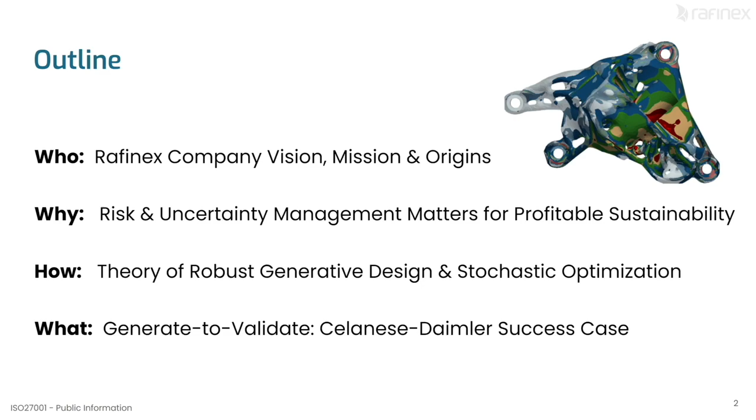Then we'll actually dive a bit into how that works. I am not holding back on how we do things. I think that's very important to also help with the language and know-how in the community.

And then at the very end, I'll discuss this on the ground with a Celanese-Daimler car part, and how that actually turns into money on the road.

Quick thing: Rafinex is a company I created in and around algorithmic innovation. We really focus on a much more efficient, sustainable future. Building cars, fridges, anything—we cannot continue this resource hungry path. Our niche contribution to that area is developing new CAE computational analysis capabilities and building those into software.

We are a European outfit from the get-go. We have people from Berlin, people from London. I myself was at Imperial for quite some time, and our knowledge is really HPC, FEM methods, numerics. It was mentioned this morning that very few people know how to actually run an HPC with 10,000 cores—well, I've got the people at home to do that.

So, second part: why risk matters and how it is key or not key to sustainability at scale while making profits. One thing often overlooked or not exploited enough is that 70-80% of a product's impact and costs throughout its lifetime are driven during the design phase, on day one.

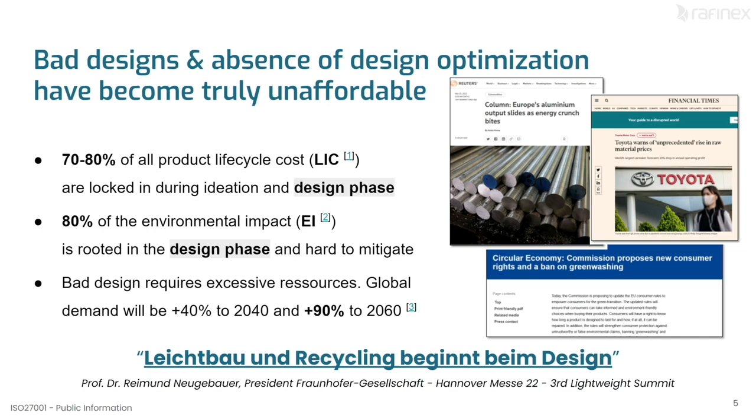I'm not talking incremental improvements. There's this guy from the Fraunhofer Institute who said that really lightweight design and recycling all start on day zero, at the design phase. So this is really where the value is. This is the carrot.

Now, what does profitability at scale really mean? It means building stuff using a lot less energy, a lot less materials, using less energy to operate. That's optimization tradecraft—it has been around for some time. So why is it not mainstream?

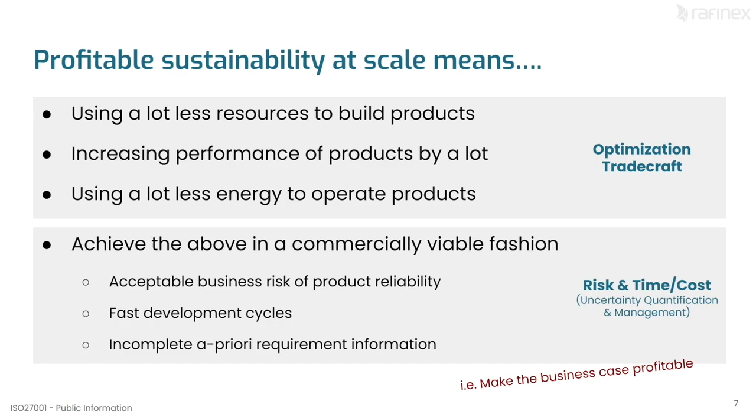Our theory, or one key contribution to that, is it's not fast enough. It doesn't account for risk, because if your product has reliability issues at the end of the day, nobody will buy that, right? So how do we do the first part while taking care of risk and reliability, and being fast enough to do this on a daily basis?

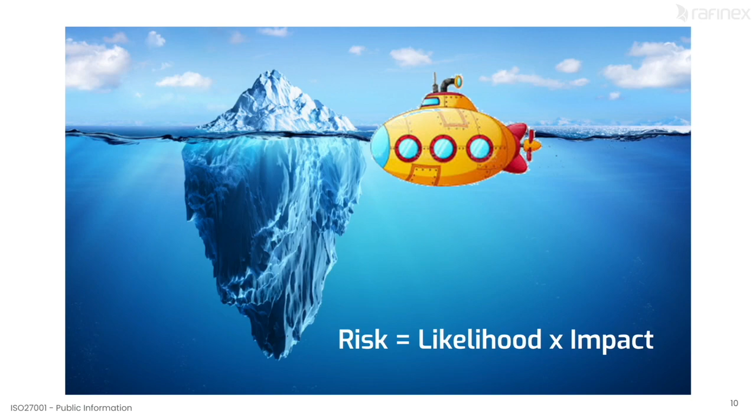So if it's risk that really kills the deal, how are we doing that today? Let's say we're designing some product, and there are requirements we kind of openly know. We put them in a requirements envelope, which may or may not actually be complete, but we wholeheartedly know there are other off-design conditions that this product will see out there in the world, and that is a known risk.

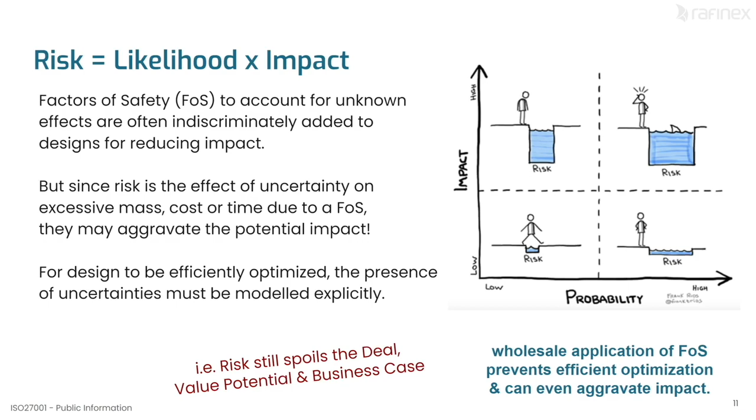We know it's there but we can't quite quantify it. Well, there are ways to quantify it, but the problem is that when stuff starts moving, just making your design fatter in every direction is not necessarily a smart move, because it might actually aggravate certain conditions, especially when it moves and has to stop, with accelerating and decelerating masses. So you only want to add mass in directions that are relevant, while keeping irrelevant or safe directions free of extra mass. So one key contributing factor is that wholesale application of factors of safety can make or destroy optimization from the get-go.

So that brings me to how. How do we actually do that? How do we still optimize with active knowledge of risk management? And this is what we specialize in.

We are really specialists in stochastic optimization, particularly in the context of topology optimization. And for the specialists in the room, it's a merger between UQ methods and classical topology optimization. Language was also touched upon a few times today already.

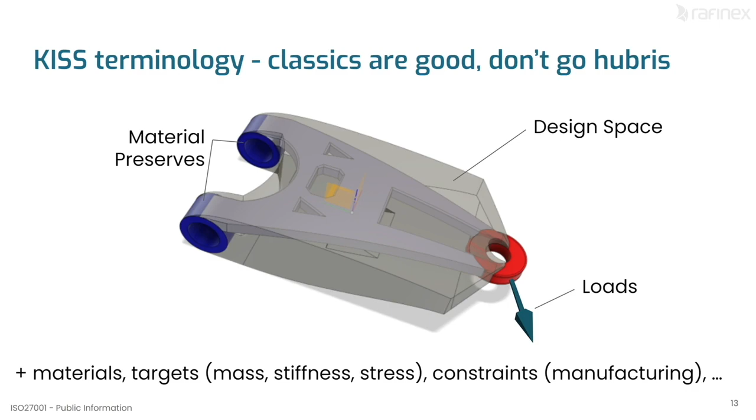I'm a big fan of the classics. If you haven't invented anything new, don't give it a new name. Use what everybody else calls it, right? So no need to go hubris or confuse the market with hyperinflation of names.

And then so this is kind of our standard field that we'll operate for the next couple of minutes.

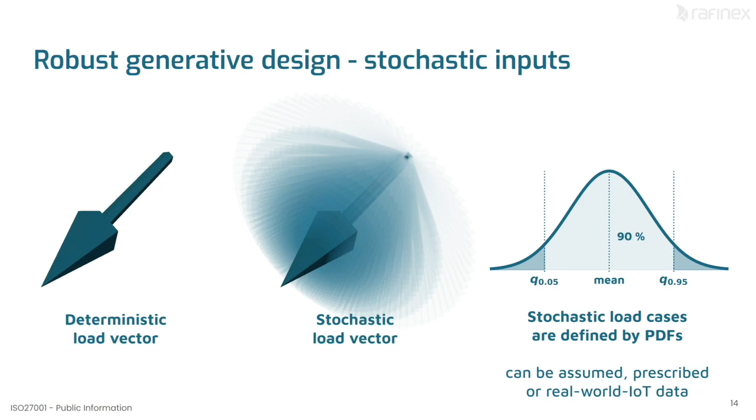The key difference for stochastic optimization is that anything that has to do with inputs, loads, material properties, they don't have to be assumed to be perfect. So your risk or your variabilities that you know or can estimate are baked into the inputs. These variabilities can either be known because you measured them in the lab, they can come from IoT data, there was a nice picture from the running shoe this morning, right? They can come back from sensored equipment. Or they can be prescribed by legislation or so on and so forth.

So if you set up your optimization problem like this, this will happen. If you make the optimization aware of variability, it will be able to sense in what directions this variability is important and in what directions not important. It's key that these variability conditions are integrated into the search gradient of the optimizer, otherwise this trick doesn't work. But what happens is that you don't get idealized optima points, but you get formally robust optima points.

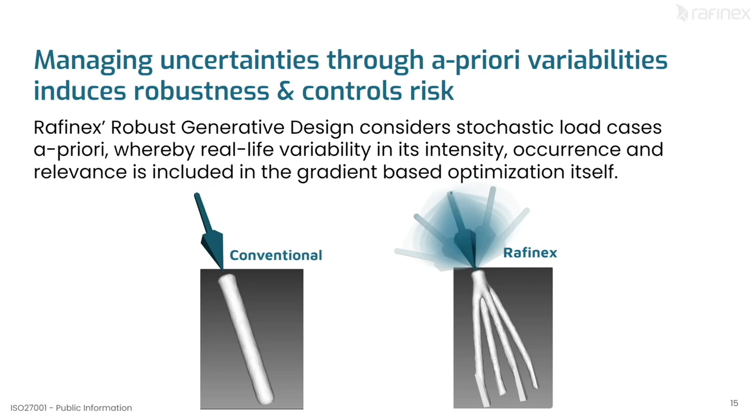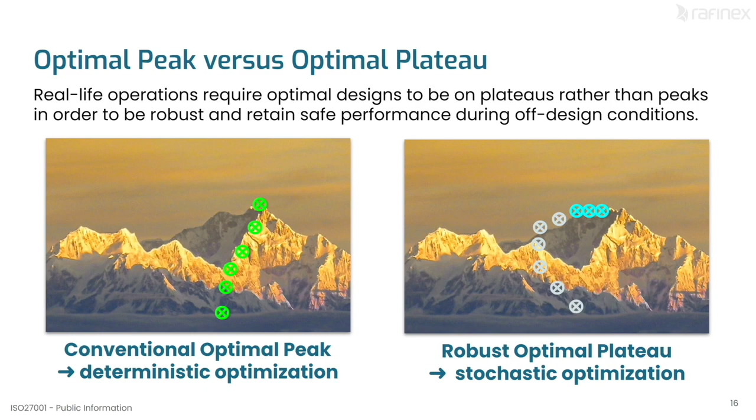There's a reason we're sitting on chairs and not sitting on segways, for instance. This is kind of the logic. So there are better designs out there, and there are idealized designs out there. In terms of solution space and math surface, standard optimization will always try to reach, locally speaking, the highest peak in the mountain range, versus robust optimization will try to find the highest plateau in that mountain range, so that if your design is perturbed from your assumed conditions in operations, it won't suddenly suffer a massive crash in performance. So you get this kind of safety buffer around you. That's the whole concept.

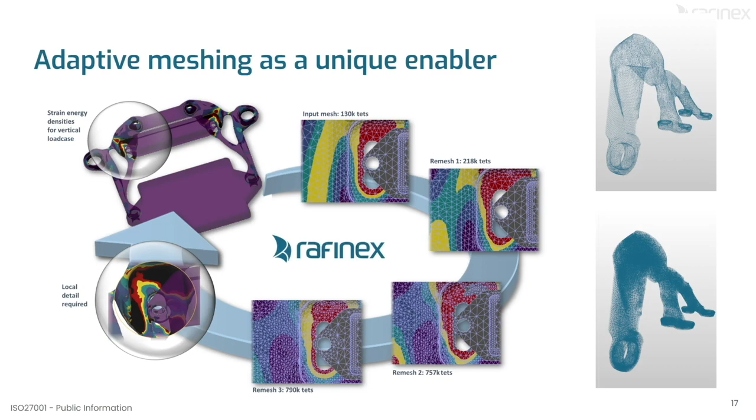Quick side note, because it's actually important, we also use fully adaptive TET meshing during optimization, which has several convergence and engineering quality properties, but more than anything else, we don't need to do any filtering of voxel or meshing or kind of smoothing, and the reconstruction later on is also much better.

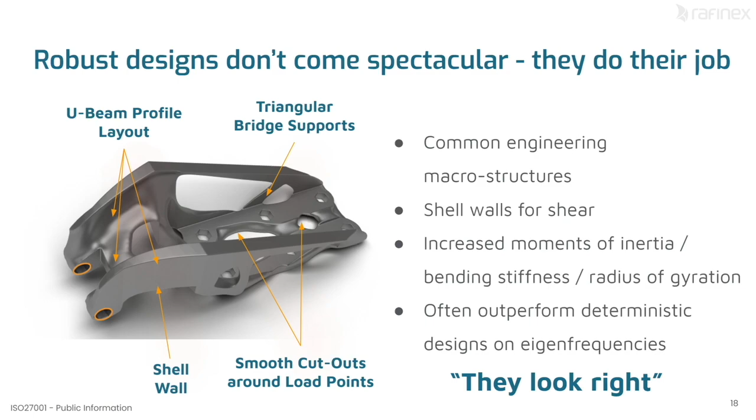So this is key. Why? Because robust designs, they don't look super Bugatti brake pedal crazy when you take them to the stand, but they look kind of reasonable. They tend to have very good vibrational properties. They can develop shell walls because that's due to the adaptive meshing. Shell structures is something that you rarely see come out of a normal optimizer. And they, like you called it this morning, they just look right. As an engineer, you can look at them, and once they're there, you can kind of follow why they do that job the way they do it.

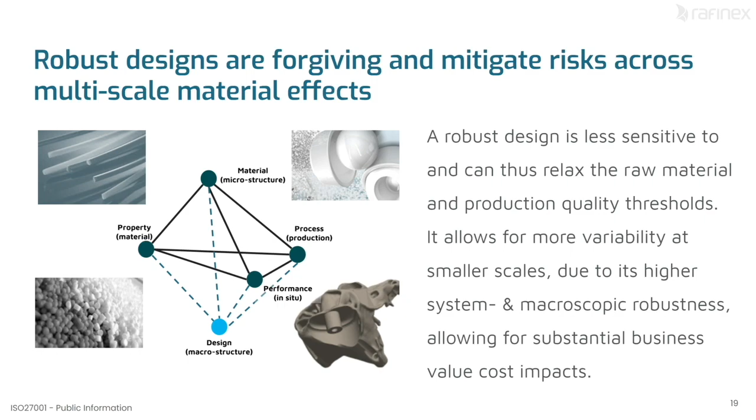Robust designs also have this neat feature that they are forgiving, meaning that you might not need the A++ grade of the material to build your design, because they have very smooth stress fields and stress behaviors within them. You might get away with using grade B material, so you can save a lot of costs there. So we have seen this in the past.

So in that sense, I hope I have convinced you that bringing the awareness of real-life variability into CAE, into optimization, leads to much more applicable, fit-for-reality type designs.

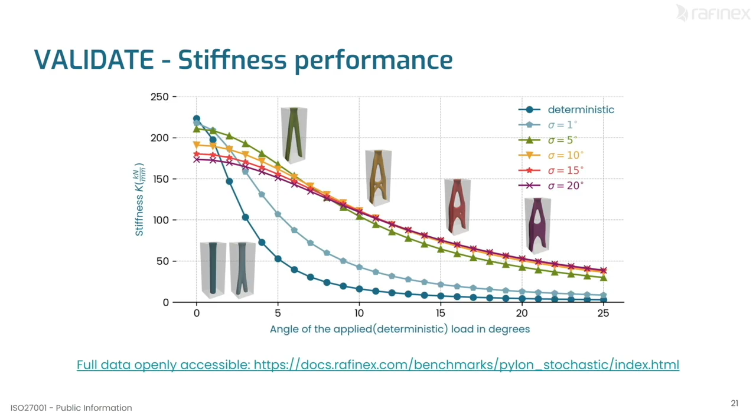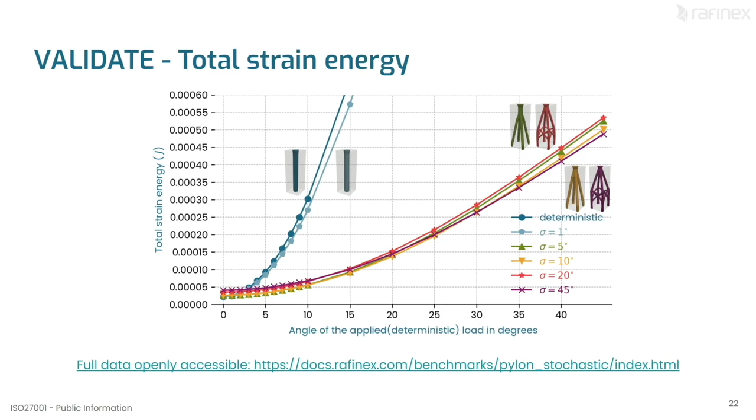So here we can see effectively this is the mountain range. We're sitting on top of a flat mountain rather than a steep mountain, and also during off-design conditions our strain energy doesn't go through the roof. Ergo, this explains why we have better frequency and better eigenmode properties as well, because the two properties are linked. Yeah, here we go.

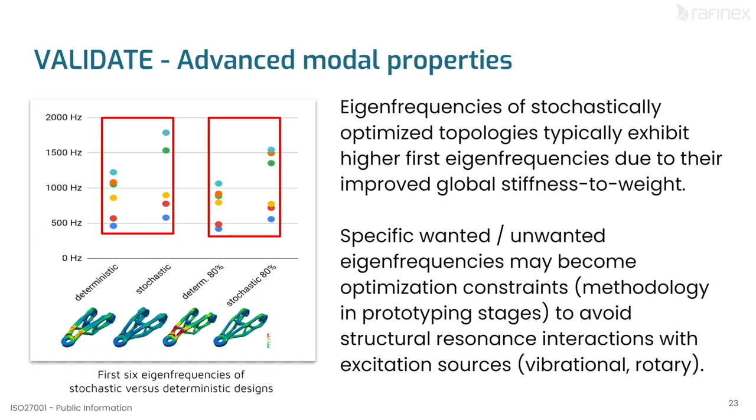So robust designs have better frequency properties, which is key for automotive, but also aerospace and space applications.

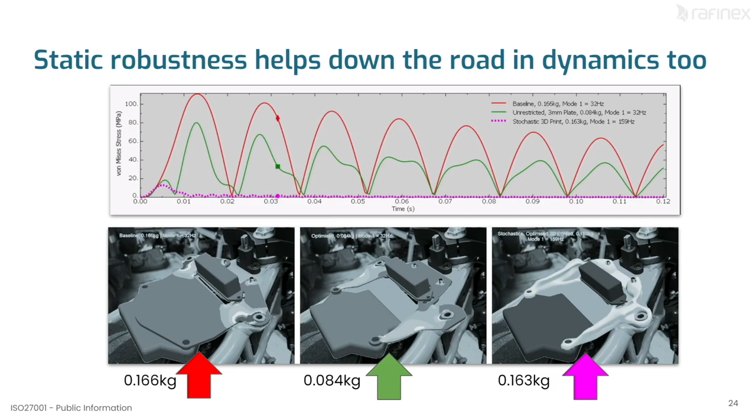Also, while everything I just said is effectively linear physics with uncertainty-driven inputs and search gradients and getting a statically robust design, you have follow-on positive impacts on durability and frequency properties, because you have this advantage that robust designs have this smooth stress field within them. So you do a lot of good on day one if you do robust designs.

Also, it's not all about additive. Here are examples of straight output. That was actually a robot part that picks up randomly oriented parts. So the question was, how do I optimize a robot gripper for randomly oriented parts?

The load conditions are not properly defined. So we managed to get through that, and in the end, they just hit print and put it on the robot, and it worked. This also exists in hollow, if you want it.

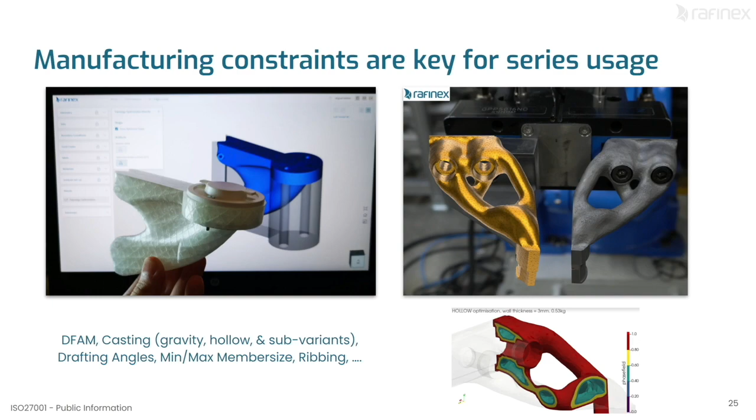The key is, sometimes it's said that generative design equals manufacturability versus good old topology optimization, which can't do that. That's a lie. Manufacturability constraints exist in existing topology optimization codes. So I want to clean up some confusion there.

If you take away one thing from today, please judge designs on their numbers and not their looks. Too many times you get a generative portfolio, 25 designs on the screen, and then you go like, oh, number 17 kind of looks cool, but who says number 17 might have the worst frequency properties? So always run the validation and look at the numbers.

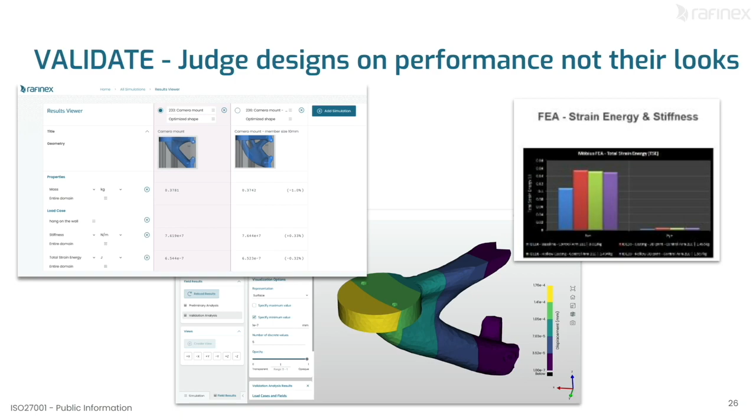We can quantify robustness, so this is a part I can't show. There was a baseline design, a normal optimized design, and a robust optimized design. Throughout the operational conditions, we looked at how often we stay below a certain threshold. We did that for 95% of the cases for the robust design, as opposed to 77% for the baseline design. So we find you this advantage.

You can do two things with that. You can say, thank you very much for the extra safety, or you can trade in that extra safety. Maybe 77% for your product was adequate, so you can then take mass out of the system until effectively you get back to your 77% robustness level.

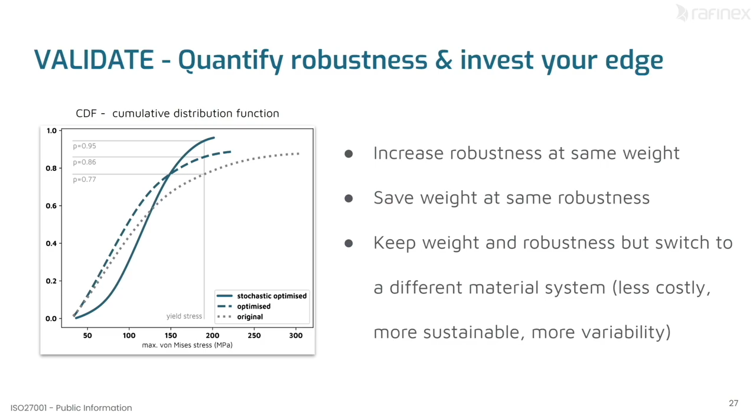One very interesting field we operate in is variability that occurs from real life load conditions that fluctuate, but there's another area of uncertainty that comes from project management. A greenfield project with undefined requirements on day one. If you do standard optimization, you optimize today, change your assumptions tomorrow, and your design may change completely. Robust optimization doesn't do that.

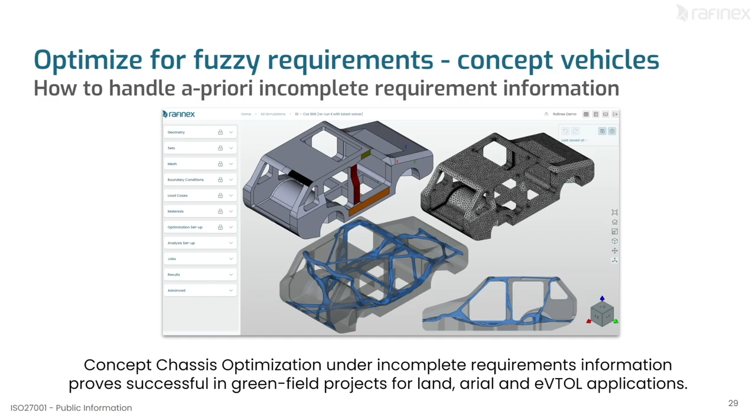So as long as you can say, eVTOLs, who's built eVTOLs before, right? There's no historical reference cases. As long as you're able to say I can reasonably assume my loads to be between A and B, with robust optimization you can get going, find good macrostructures, good torsional stiffness designs, and then make project management decisions on that basis.

So, very real, very show-me-the-money. This is a part, an engine mount from a Daimler car. It used to be metallic, pre-2017, 2018. Then Elringklinger, Daimler, and Celanese, formerly DuPont, switched this to a polymer, a magic sauce DuPont polymer with some fibers in it, don't ask me.

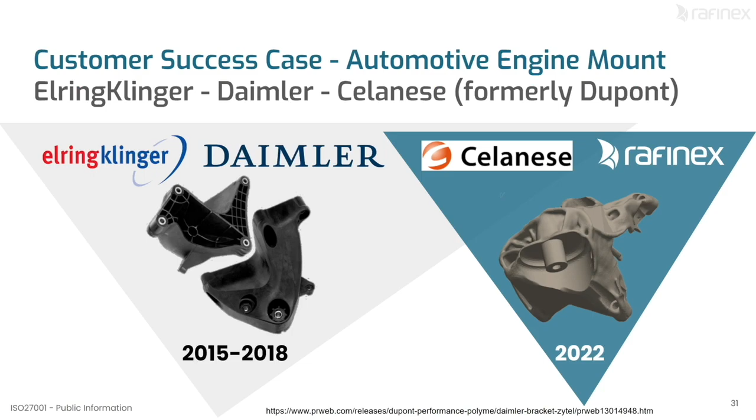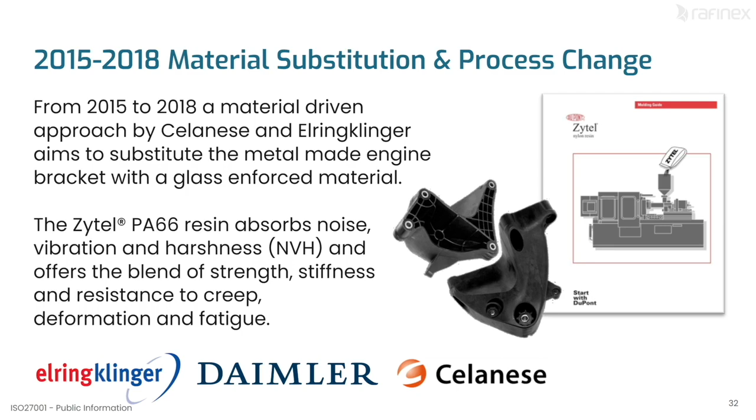Anyway, they went from metal to plastic with a new injection molding process. Took them a few years to get that right, but it's a production part. The question was, okay, this is, they switched this design. But then last year Celanese came to us and said, well, the injection molding process has so much more freedom. How about now we go after the design?

So that was very interesting, because for them it was a new design, or an application with a material type and production process which hadn't been done in that form before. We were tasked with showing them how fast we can be, how fast the turnaround time is. They had a similar turnaround time of about a month per part. They needed obviously the same performance levels, and they needed it to still be injection moldable. That comes with member size constraints and that kind of stuff.

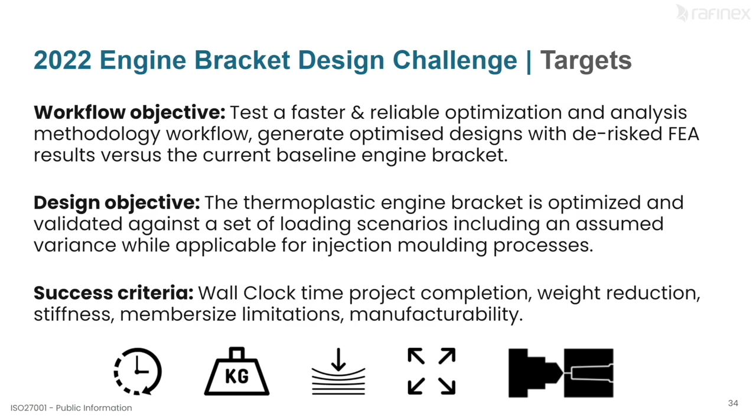So I'll quickly run through what our product, which I try to avoid talking too much about today, is: Möbius. It does all of this automatically in like 4 steps, and we're working hard on adding a 5th step. So it all starts here.

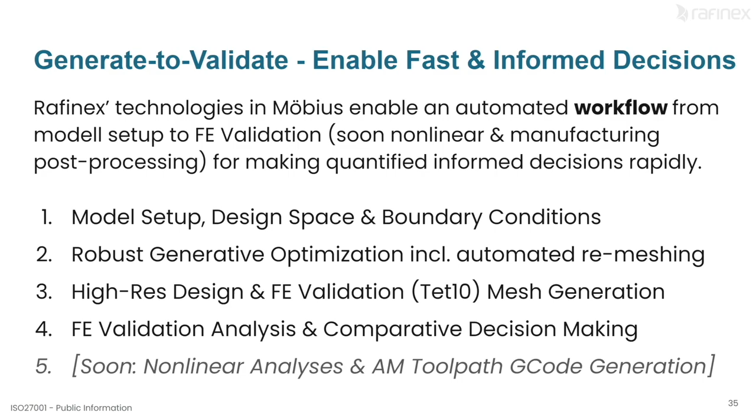It's a browser-based, ISO, cloud-secured kind of SaaS product. We operate in defense and aerospace as well. And so you start with your model setup.

So CAD, colored CAD, or even often meshes as starters. There's also a lot of knowledge that goes into how to properly set up such models and boundary conditions. The devil is in the details - how to do clamped bolts, not clamped bolts, all these things.

Shout out to the MIT team on the education part. There is some art and some deep knowledge on how to properly model connections in FEM and even optimization, because it does influence the design substantially.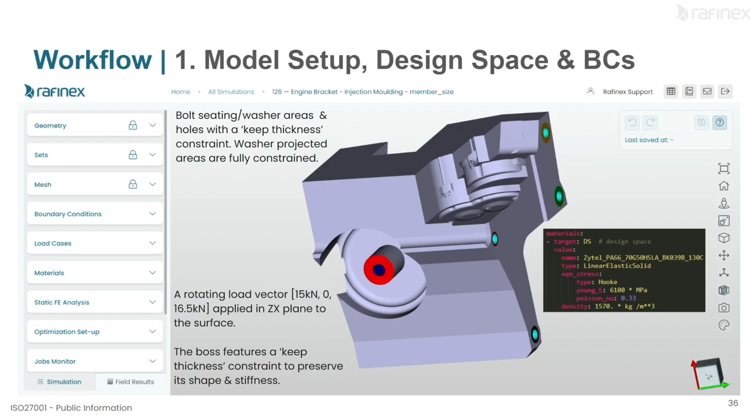Off we go. Second step, we do our robust optimization search algorithms together with our adaptive meshing, and out comes a design. Now, everything I show today are straight FEM meshes, so we run on the adaptive TETs.

We don't do filtering, we don't do interpolation, we don't do smoothing. That means once the optimization is done, we have a really high resolution part under the hood that we can just extract, and we change the meshes from linear to second order. Why? Because now we can do a proper stress-based FEA analysis.

This is usually one of the hidden tripwires in the workflow, because people sit there fiddling with the cutoff thing, or the alternative is to recreate the inspiration-based design on the second screen. It wastes days. This is where we preserve a lot of the curvatures on the joint areas where the frequency properties come from. We preserve all of that work that the optimizer has done.

So this is fully automated. I don't think anyone out there does it like that. So here in this case, we just ran 3 volume fraction examples.

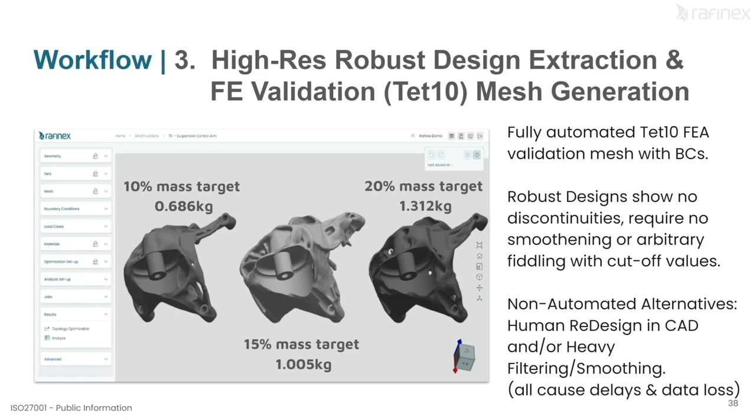Off we go. FEA validation, all your boundary conditions information is maintained. No re-encoding them, or jumping from CAD to topology, or from topology to analysis codes. If you still need to do further Nastran nonlinear based analysis later on, you can just download all the files and shove them over.

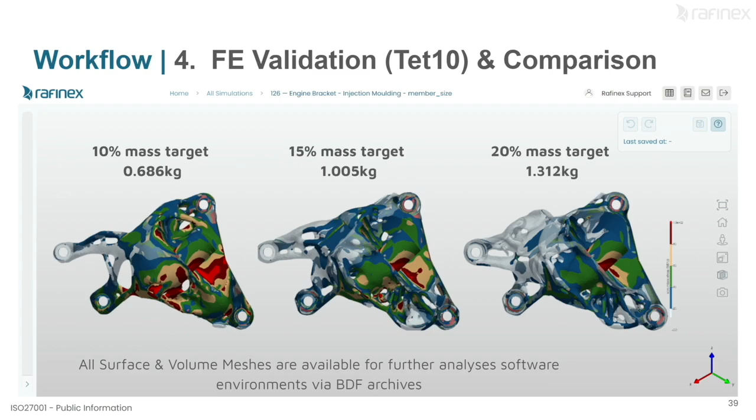So in this case, we settled on the middle one, the 15% volume fraction model. It met all the requirements. The member size, the draw directions, the draw angle, all that kind of stuff was there, and the numbers added up. Now Dupont then went away and they did Digimat nonlinear material checks.

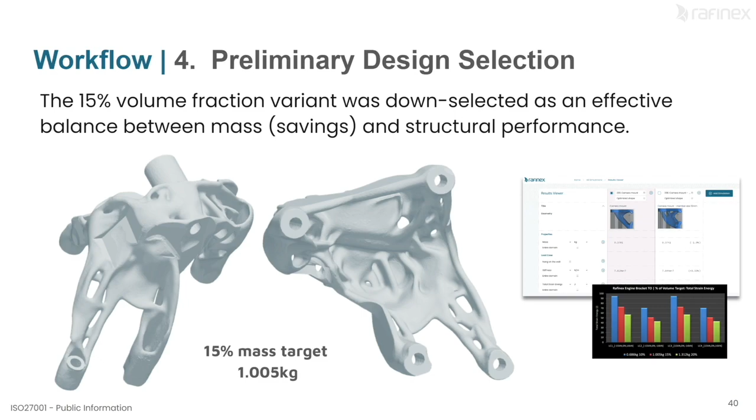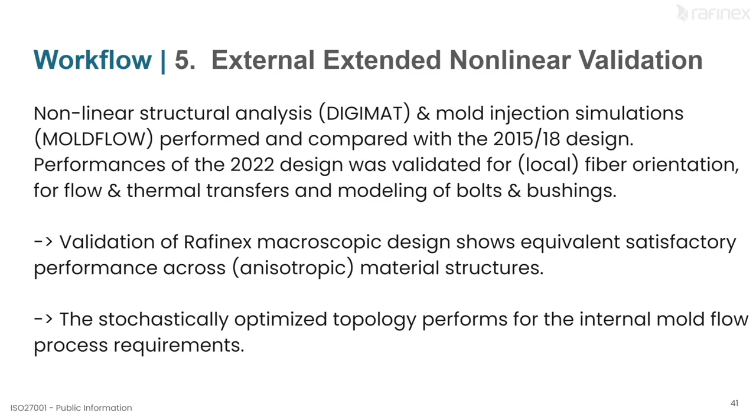We won't be capable of doing that anytime soon. And they also did mold flow injection molding simulations, and we cleared those, so now they're actually looking at building test molds for this part, and they were kind enough to give PR exposure in Germany and in the US last week about this whole design workflow.

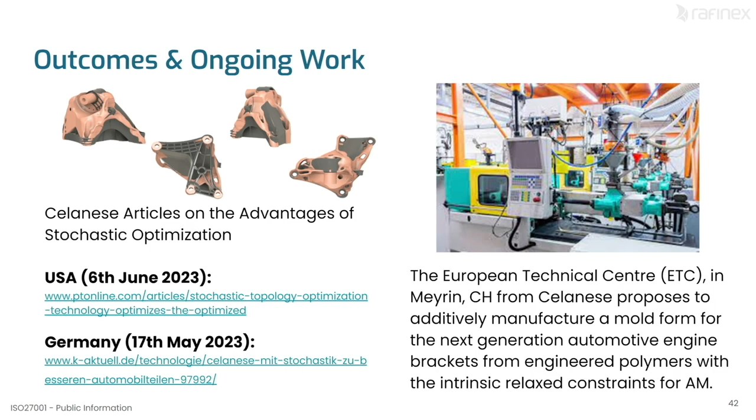So just to be obnoxiously clear on conclusions, this workflow for Dupont used to be 3 hours, but we made the code twice as fast last month, so now it's an hour and a half. This design in an hour and a half, plus FEA validations, plus analysis and discussion and so on, they decided on this design in 2.5 days, compared to about 30 days before.

We took out 25% of the mass, the strain energy dropped by 30%, the frequencies went up, and you still had this robust design around it. So quite a big milestone success for us.

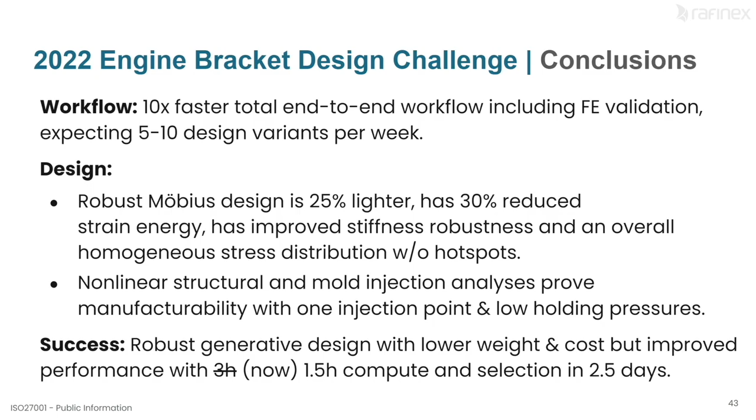Because it was mentioned this morning, as any other post-processing kernels on them that either suppliers or customers give us - here we've been working with ModuleWorks out of Aachen for about 4 or 5 years. For those who don't know, if you open up your CAM software long enough, 90% of the market share of the toolpath and G-code generators is ModuleWorks. So we just went straight to the source.

They gave us their PBF and WAAM toolpath generators, so we can just run them, and if you were to have the machine, you can directly connect there. But this is prototype. We aim to get this up and running for Formnext in November.

And then as well on the nonlinear side, because you may have picked up on the words frequency, uncertainty, reliability, both from the APL and from NASA this morning - having the proper validation in-house of buckling, random vibration, transient nonlinear responses. So I'm working with some defense customers, and in about a month's time there should be news there.

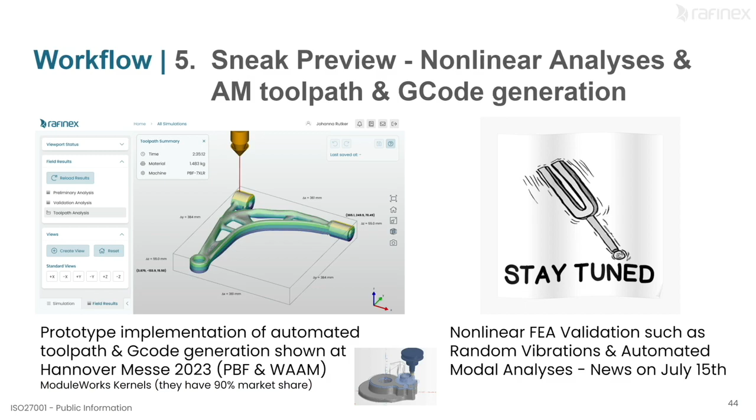Just because somebody mentioned it this morning, I can't remember who, we also run anisotropic codes. Yes, anisotropic carbon winding designs are different. The straighter one in the middle is run with on-the-fly dynamic anisotropy. The one on the right assumes some isotropic materials. So we're working on special flavor physics designs.

This is a lot of work being chaperoned by GKN and McLaren out of the UK. So hopefully I've convinced you that it is possible today to be profitable and sustainable at the same time. Actually, you should and you want to go after it.

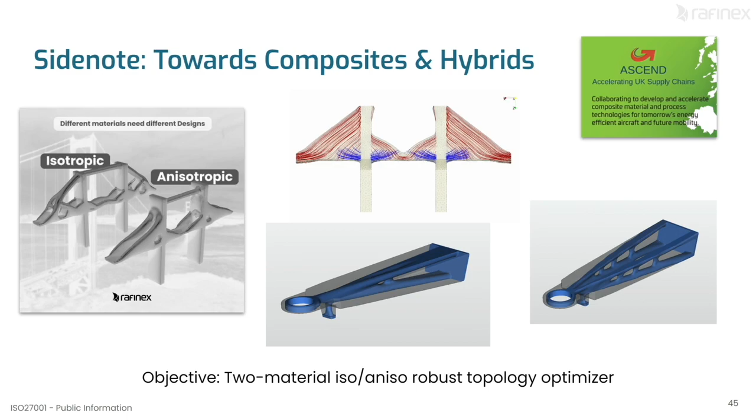Some customers even, cutting 3 grams, 4 grams of plastic out of a wish mop bucket saves them $1 million in purchasing costs each year. That's the kind of levels that we deal with. So it doesn't always have to be the flashiest of designs. You can do a lot of good with small modifications as well.

But this only works if you're fast enough and if people have the trust, the validated trust, that if you strap your robot gripper into the robot and send it to Hamburg for the Airbus factory, that it won't die on you. So yeah, key takeaways for today.

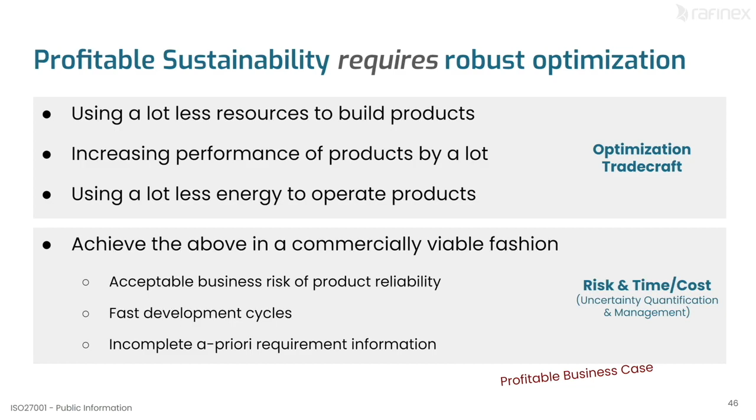Being aware of uncertainty, being aware of risk, bringing those things into the optimization is absolutely crucial. The math is not necessarily the simplest, but you will get better designs, and you will get them a lot faster.

And that's me. How was I on time? Spot on. Good. Thanks.